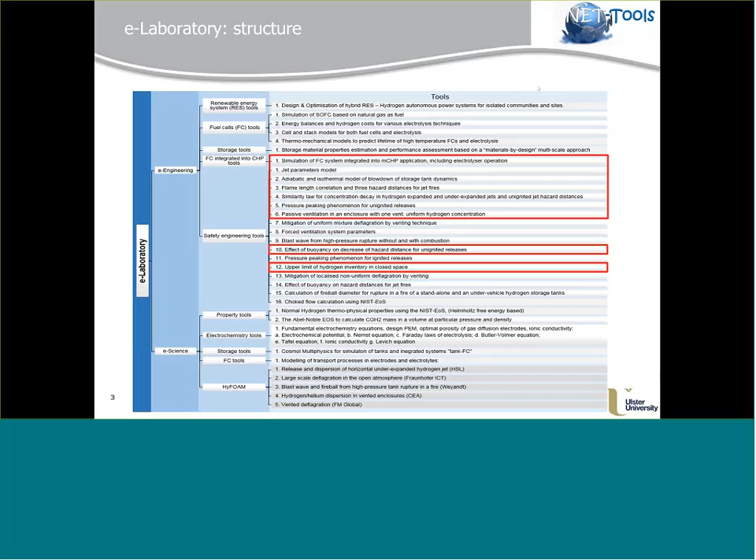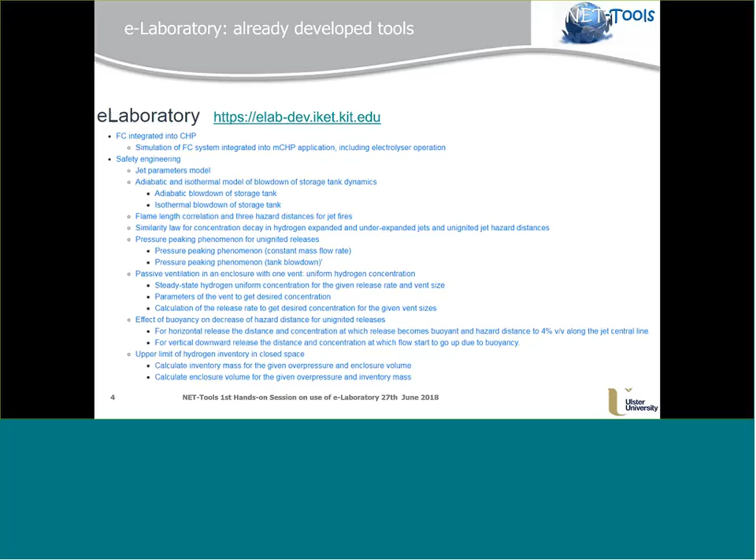So this is the way it looks now. You probably already saw this when you went to the link and logged in. This is the whole bunch of tools we have so far, and we'll start off talking about the safety engineering tools, the safety engineering toolbox, starting with the jet parameter model.

This model allows you to calculate parameters of the flow at the exit from the tank or pipe, or whatever happens, like in case of an accident, or if you need to calculate your flow rate for your particular installation when you have your pressure and pipe diameter. This model combines, it can be used for both expanded and under-expanded jets.

In this graph you can see the short description, where you can see the reservoir, where the flow velocity is assumed as 0, the nozzle at point 3, and the pressure and velocity equal to ambient and local speed of sound, which is called the notional nozzle or effective nozzle, at point 4.

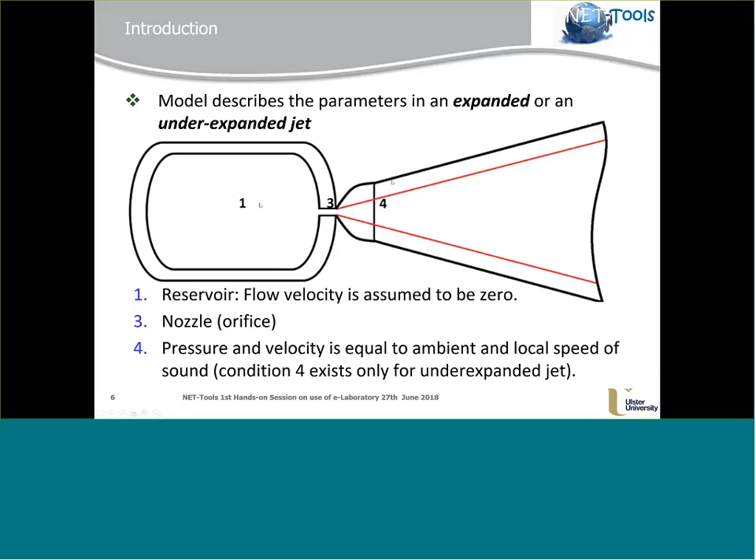Point 4 is only used when the jet is under-expanded. For an expanded jet, the conditions are taken from point 3 during the calculations.

Every single tool has the scenario details already pre-filled, so that whenever you click on the tool, you already have some data which you can change for your own purpose and calculate your own task. These are default values which we've taken from real scenarios to validate the model.

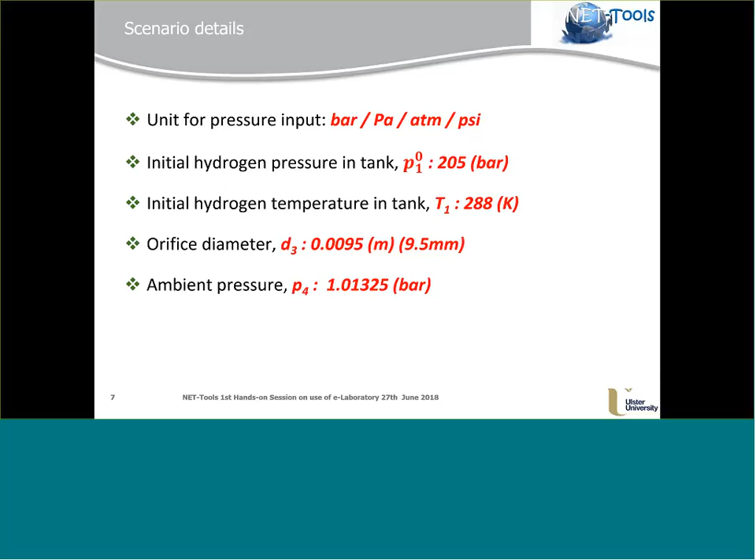If you click on the link for jet parameters tool, you will be able to see the screen where you can input your orifice diameter, nozzle diameter, ambient pressure, and pressure in the tank. You also have to know the temperature in the tank in order to be able to calculate parameters at the notional nozzle and at the exit.

There is also an option for every tool where you can change your input and output units for temperature, length, volume, pressure. During the development of the e-laboratory, there will be new units added, so that anyone in the world who uses the NET-Tools and e-laboratory can use their own system.

Every tool has a description, a short description, where you can read about this tool, what it calculates, and where it actually comes from. It includes all the links to the publications, because every single tool is based on a publication which is validated.

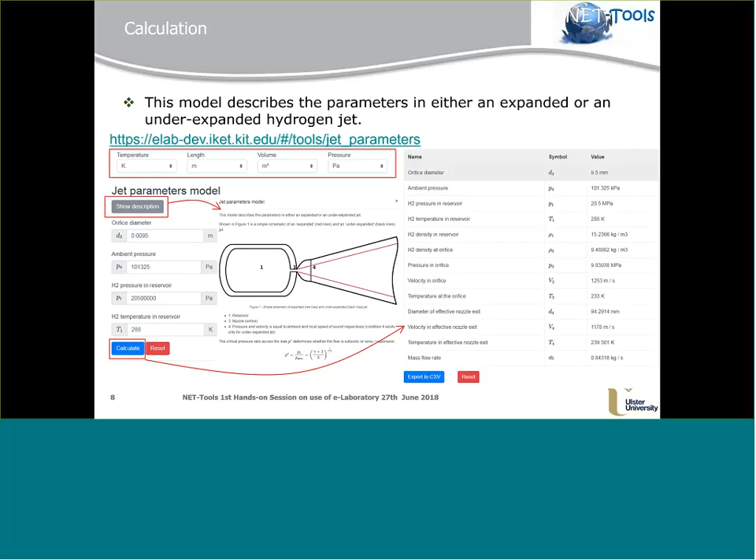Now, another tool from the safety engineering toolbox is the adiabatic and isothermal model for blowdown of storage tank dynamics. This tool allows you to calculate how the pressure in the tank changes with time for a particular nozzle, for a particular orifice, from a pipe or from a TPRD or whatever.

Since all hydrogen-powered vehicles have storage up to 70 megapascal, and at refueling stations it's even more, about 100 megapascal or 1000 bar, an unintended release from such high pressure can create a highly underexpanded turbulent jet.

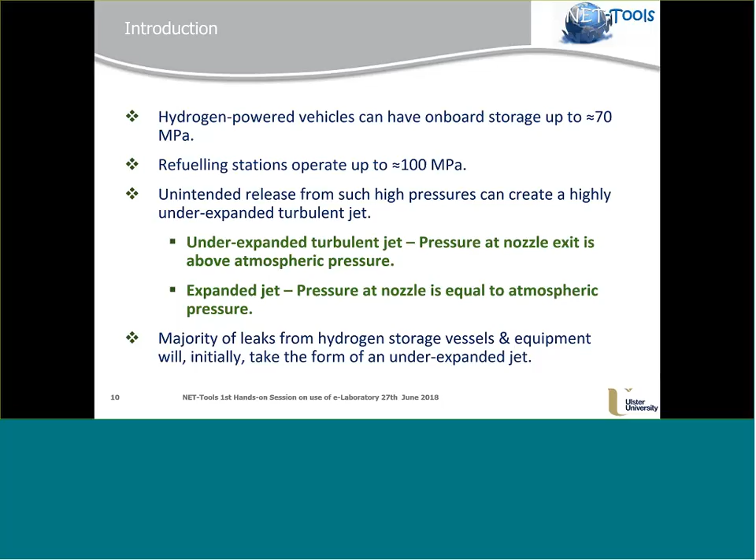The majority of leaks in storage vessels and equipment take the form of an under-expanded jet, and during the tank blowdown, it will end up expanded. So this model incorporates both the underexpanded part and the expanded part.

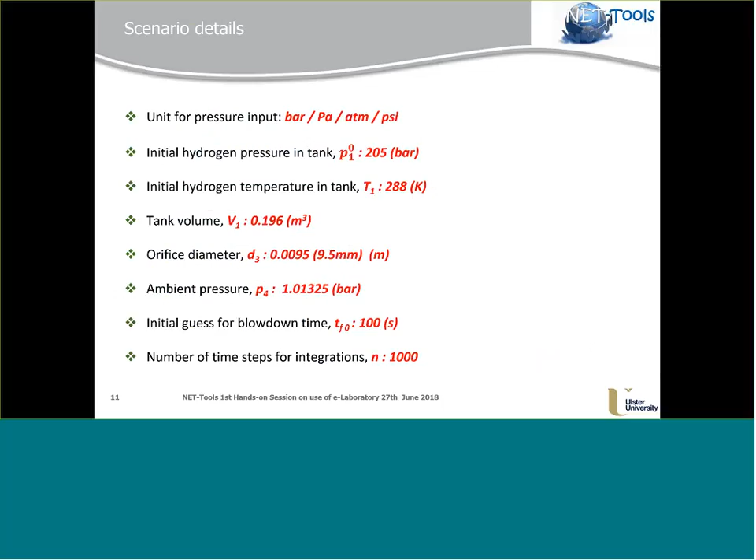So this is the scenario details which we use to validate the model and to check that we are getting the correct results for both cases.

There are two options, adiabatic and isothermal. In this presentation we'll cover the adiabatic part. It's pretty much the same in terms of interface, so I'm not going to cover isothermal.

The description here again shows you what the model is based on, all publications, and how it works.

After inputting all the parameters for the pressure in the tank, temperature, tank volume, diameter of TPRD or a pipe, temperature and pressure, you can get the full dynamics of the tank blowdown.

By changing parameters, you can calculate what time would be required to blow down something bigger, like a transportation lorry, big tanks, or smaller tanks, and you can play with the values and see in terms of the time by changing the orifice diameter. This gives you a feeling for how long you need, if it's indoors, for example what kind of ventilation rate you need to extract this amount of hydrogen from an enclosure.

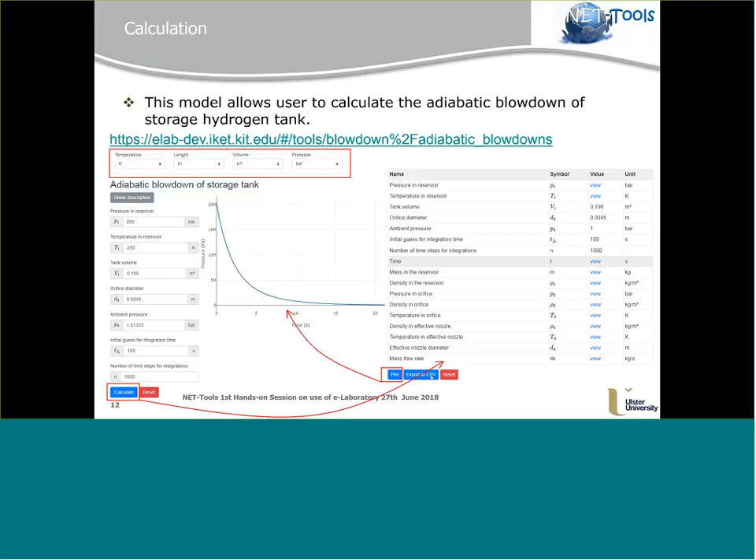Moving next, we have the flame length correlation and hazard distance for jet fires tool. This tool allows you to calculate the flame length based on the diameter of the release and the pressure in the tank. This tool uses the dimensionless flame length correlation, and all the links are provided in the tool description. It's only dependent on the parameter of the actual nozzle exit and the density of the surrounding air.

The separation distance, or hazard distance, was calculated using the LaChance publication, based on 3 parameters: no harm at a distance of 3.5 flame lengths, the pain limit at 5 minutes exposure at 3 flame lengths, and third degree burn after 20 seconds of exposure at a distance of 2 flame lengths.

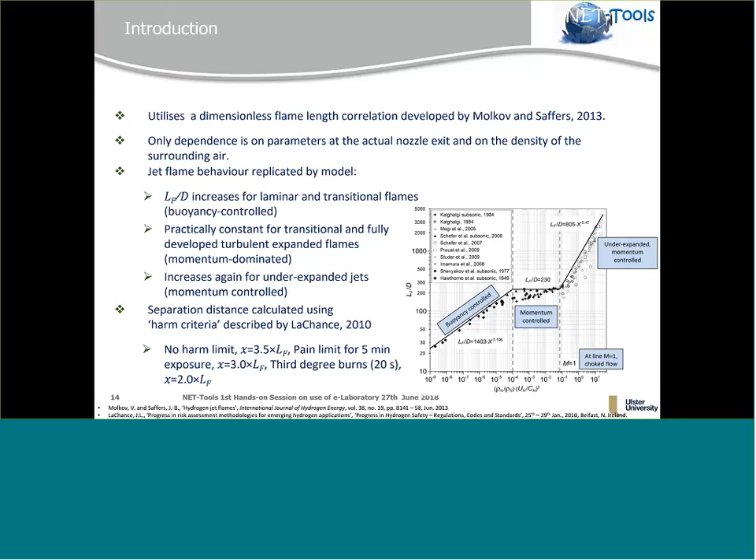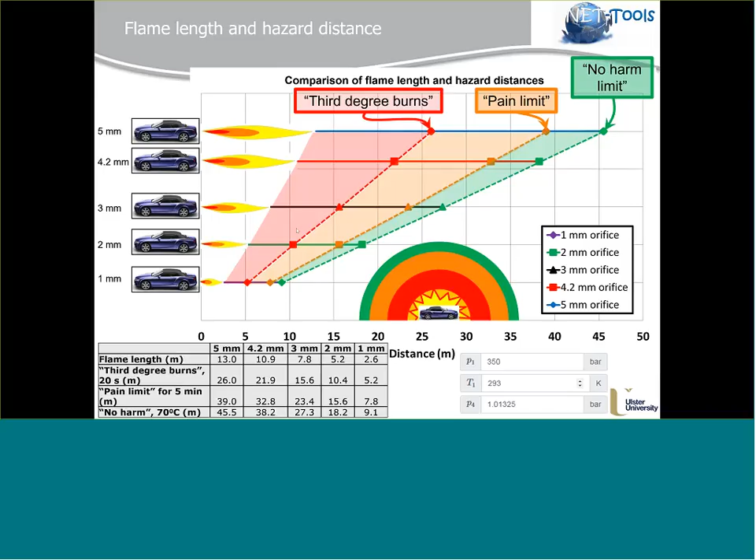So as I said, we had a 350 bar tank and let's say 1 millimeter diameter, and the results look like this. You can see that the flame length for a 1 millimeter nozzle diameter at 350 bar is 2.6 meters, while the separation hazard distance changes according to LaChance: no harm at 9.1, pain limit at 7.8, and third degree burn at 5.2.

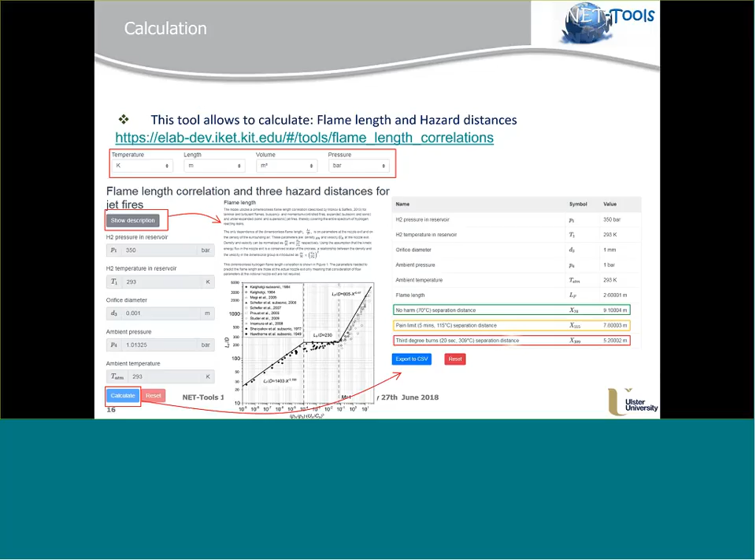The next tool from Safety Engineering Toolbox is the similarity law for concentration decay in hydrogen expanded and under-expanded jets, and unignited jet hazard distances. This tool allows you to predict concentration decay of hydrogen for subsonic, sonic, and supersonic unignited jets. It's also used to calculate the hazard distance formed by the size of the flammable envelope based on the 4% concentration.

The correlation is shown by the formula, where X is the actual distance from the nozzle, D is the nozzle diameter, rho n is the density at the nozzle exit, and rho s is the density of surrounding air. As well, C ax denotes the mass fraction of hydrogen at the distance X.

This tool allows you to calculate the distance from the nozzle to 4, 8, 11, 16, 29.5 stoichiometric, and plus you can specify your own concentration in the range from 4 to 75% and calculate the distance to this concentration along the axis. This tool utilizes the hydrogen jet parameters model for under-expanded jets and uses isentropic pressure and density relations for expanded jets.

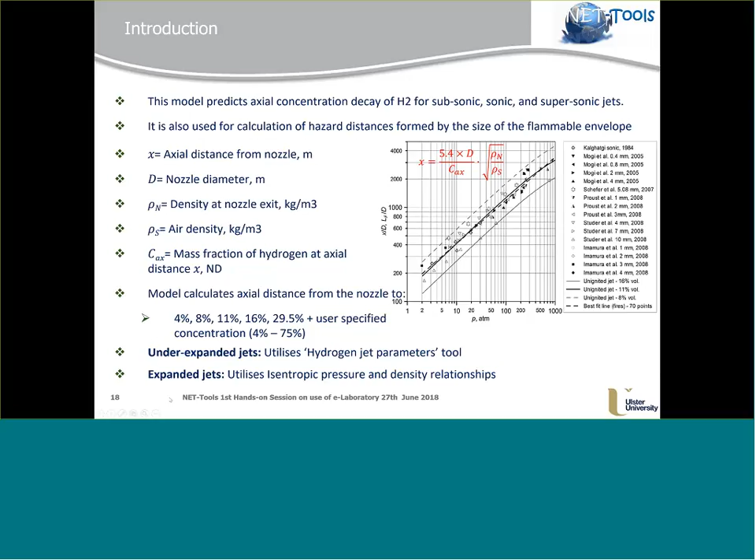Hold on a second. Yes.

And 4% is basically the hazard distance based on the hydrogen envelope: 32 meters for a 5 millimeter orifice diameter at 350 bar, which is quite long.

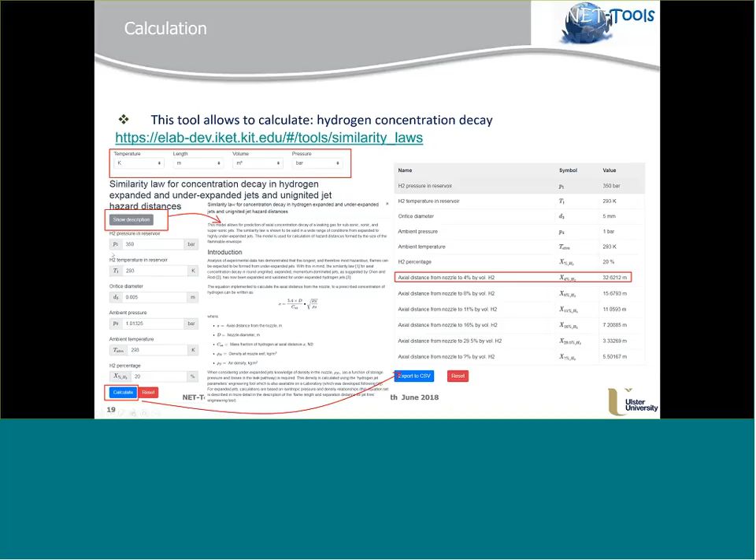The next tool here is the passive ventilation in enclosure with one vent for uniform hydrogen concentration. Why passive ventilation? Because it's different from natural ventilation, which assumes that the flow through the vent, the inflow of fresh air and outflow from the enclosure, is equal, and this flow is separated by a so-called neutral plane.

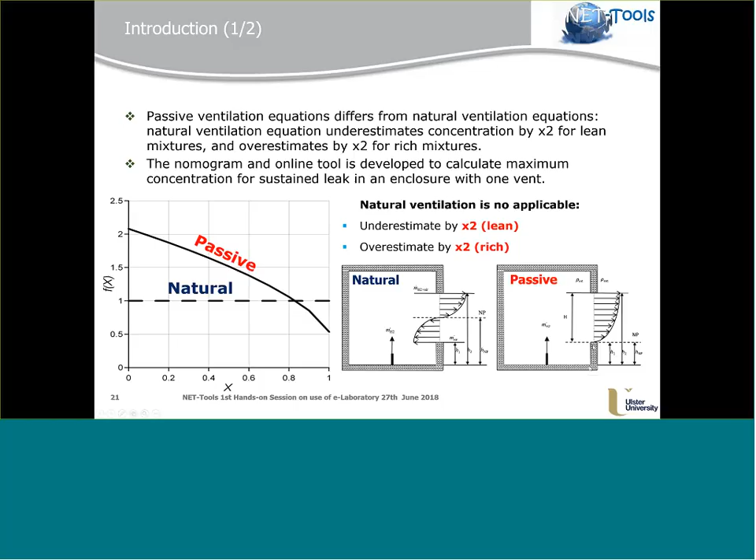A nomogram was also developed, and an online tool to calculate the maximum concentration for steady-state leak in an enclosure with one vent. In the case of passive ventilation, the neutral plane can be anywhere compared to natural ventilation, from the center of the vent up to the bottom, and it can even go below if the mass flow rate is very high.

One example: the maximum normal hydrogen discharge allowed for permeation from fuel cell leaks is about 150 normal milliliters per minute per car, which is a mass flow rate of 2.1 by 10⁻⁷ kilogram per second. With this mass flow rate, for a garage vent of brick size - 25 centimeters by width and 5 centimeters by height - we get about 1% concentration at steady state inside the enclosure.

But since the ventilation rate for natural and passive ventilation is proportional to the area of the vent times the square root of the height, the difference for the same area - if you make it not horizontal but vertical - the efficiency will increase by 2.2 times, which will reduce the concentration of hydrogen and probably allow a higher permeation rate. This also has to be taken into account while doing hydrogen safety engineering, especially for natural or passive ventilation systems.

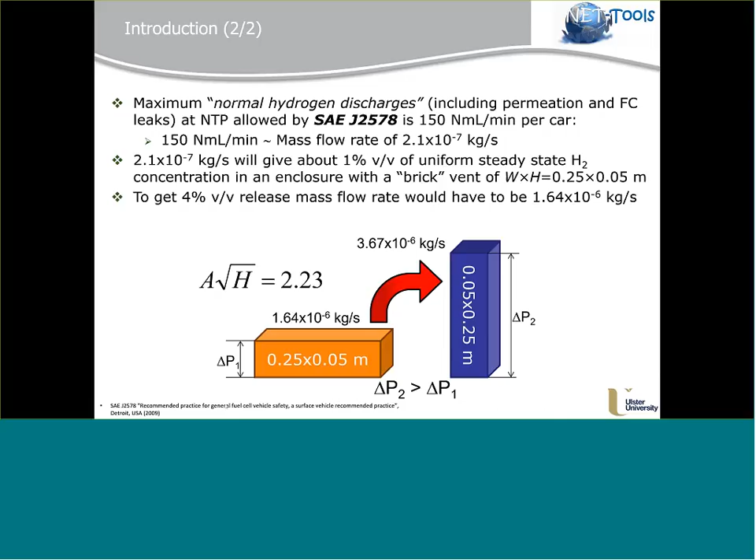This is the nomogram, the graphical representation of the tool. The set of equations are shown on the left, and if you need to quickly assess the concentration in the enclosure with a particular vent, and if you know the hydrogen flow rate for the given installation, you can use this nomogram and calculate on site.

The example is given for 1 gram per second, equivalent to about a 50 kilowatt fuel cell or light duty vehicle. The calculation example shows you start by selecting the release rate of 1 gram. On the bottom graph, you select the height of the vent, then on the right top you select the width of the vent. Let's say we have half meter height and 1 meter width.

Then you drop the line to the function curve, and you'll get that the concentration for this particular vent with this flow rate will give us an unacceptably high 13.6%.

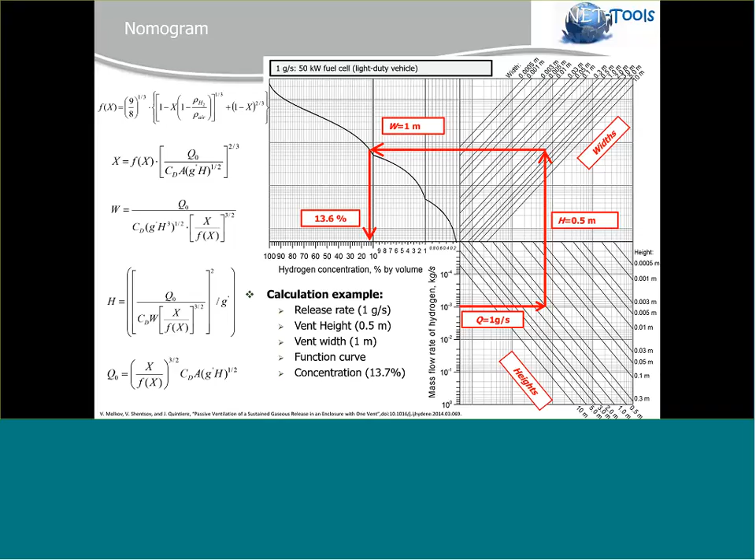But if you want exact results, it has some error of course, because it's graphical - it probably will give you 5 to 10% error. If you want exact results, you would need to use the tool. This nomogram will be available to download and print shortly with the development of the tools, but for now you can only go and calculate all the parameters from the laboratory.

You need to specify ambient temperature and pressure, and the discharge coefficient for the ventilation. Discharge coefficient shows the effective area of the vent which is used for ventilation. The default value is 0.6, which is commonly used and validated, however for different vent parameters it can be different.

In this case, we select an input of 1 gram per second release with half meter height and 1 meter width, and we got 13.6% of hydrogen for the enclosure - 13.6% uniform concentration of hydrogen in the enclosure.

Next tool is pressure peaking phenomena for unignited releases. These tools give you the pressure dynamics inside the enclosure in case you have an unscheduled release, because all hydrogen vehicles kept inside confined spaces can cause this hazard, and it was proved, with a number of publications done on this. This can result in really high pressure inside the enclosure, which could create major damage or even collapse.

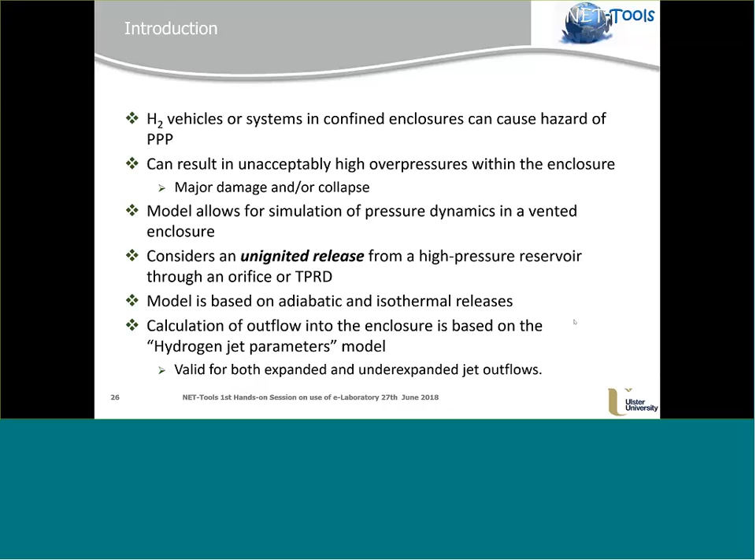Let's consider the unignited case for a high pressure tank through the orifice, or the TPRD, which can be triggered due to fire or malfunction. This model is based on the adiabatic and isothermal release, and it can be used for both. It also uses the hydrogen jet parameters model to calculate the flow rate from the tank, and it's valid for both expanded and underexpanded jets.

This graph shows the overpressure effects on buildings and humans. As you can see, an overpressure of 0.2 bar, or 20 kilopascal, is capable of destroying residential structures and making them collapse, while causing common serious injuries and possible fatalities to humans.

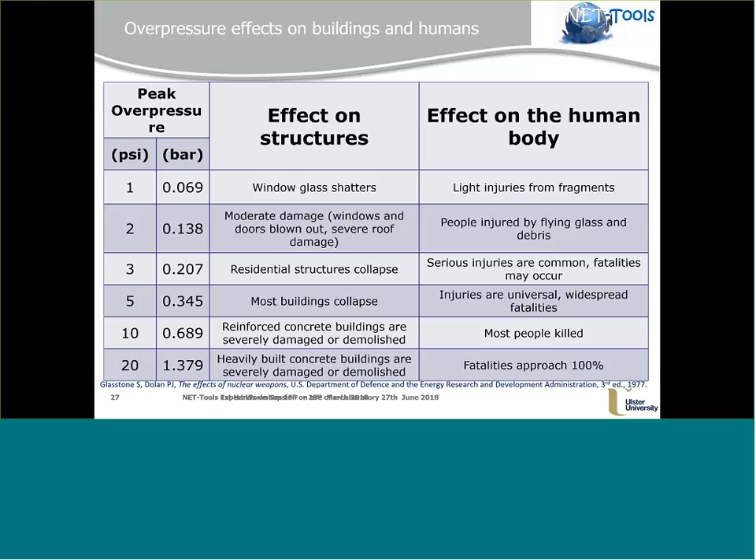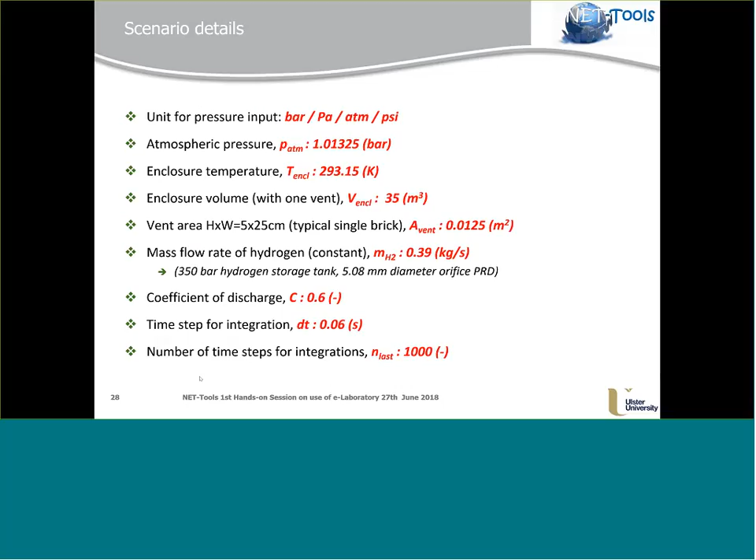The scenario details are taken from the most common case: a garage of 35 cubic meters volume, normal temperature and pressure, typical single brick vent size, and the mass flow rate for a 350 bar storage tank with 5 mm TPRD, which would give nearly 0.4 kilogram per second of hydrogen.

So while doing hydrogen safety engineering, I think it is essential to check whether your ventilation parameters are sufficient to withstand the pressure peaking phenomena. This tool is quite flexible to assess the dynamics of pressure inside.

You can combine all the areas of your ventilation. It's not only for one vent or two vents — you can combine all your ventilation openings and calculate the total area, and you can specify the pressure inside the tank storage facility. You can specify diameter, and in the end you will calculate your pressure dynamics as well as the mass flow rate and overpressure.

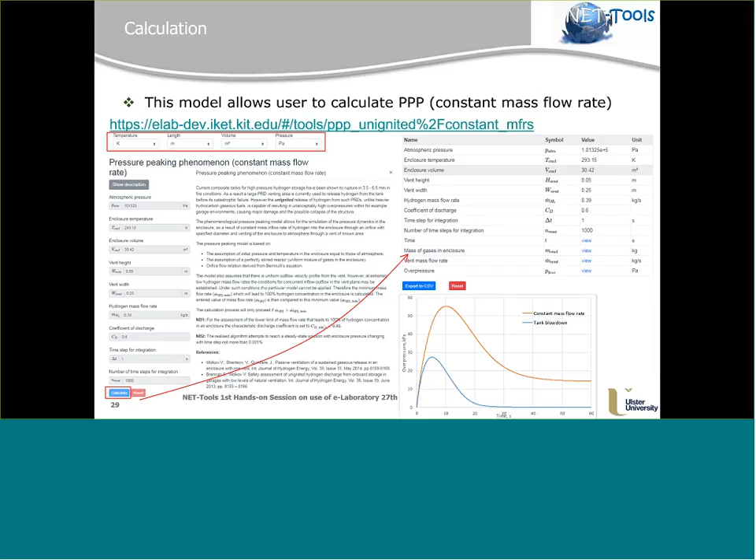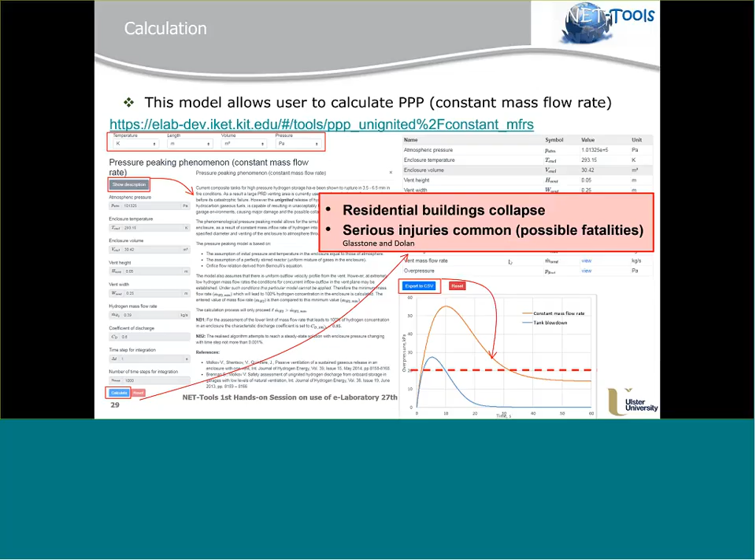That's what I wanted to say: at this level of overpressure, most residential buildings will collapse, and this will cause serious injuries and possible fatalities to humans.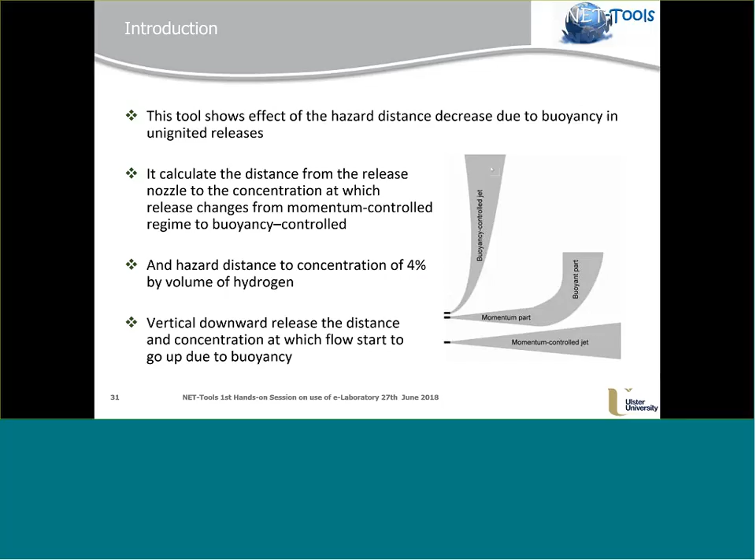It also gives you the hazard distance to a concentration of 4% by volume. Another feature is you can calculate the vertical downward release and the distance and concentration at which the flow starts to go up due to buoyancy. This is how the tool looks: you need to input the pressure of the tank, temperature, and diameter. After calculation, you will get the distances to every concentration, and you can specify concentrations such as 4, 17, 30, 40, 50, and 60, which are predefined, and you will get the distance to these concentrations, as well as the distance to the turning point for the downward release.

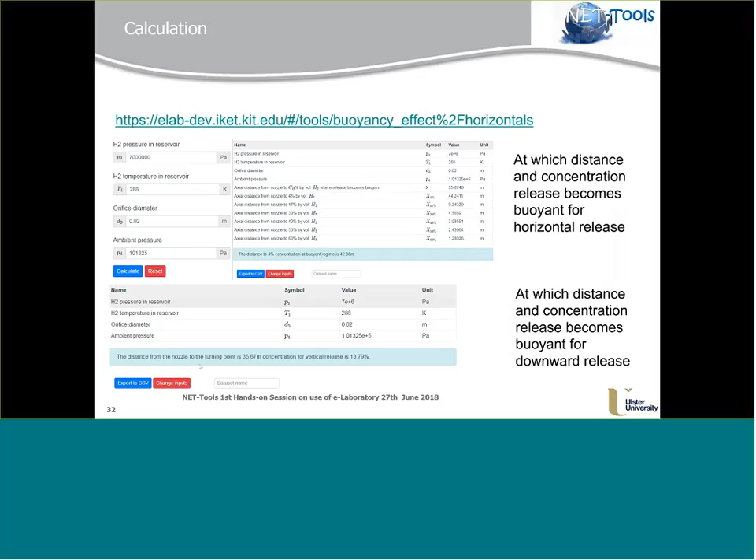Now we move into the next tool: upper limit for hydrogen inventory in a closed space. The model behind this tool allows you to predict the mass of hydrogen which may be allowed to be released inside an enclosure, without causing any destructive overpressure. The model assumes that the enclosure is filled with hydrogen and air at initial pressure.

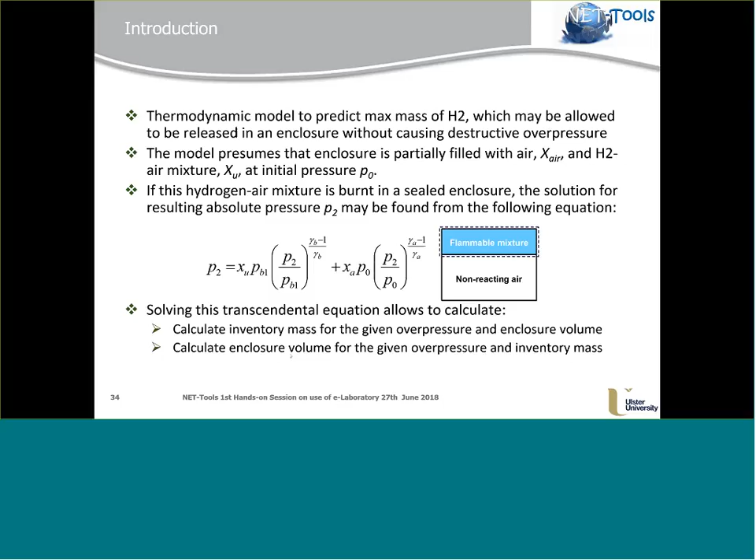If the hydrogen-air mixture present in the enclosure is burned, the solution of this equation will result in an absolute pressure, which can give you a clue whether you are on the safe side or not. This tool allows you to calculate these transcendental equations, to calculate the mass of inventory for a given overpressure and enclosure volume, or to calculate the volume for a given overpressure and inventory mass. So it has two options, and both are shown here.

For example, you need to calculate what mass of hydrogen in an enclosure of, let's say, 35 cubic meters you may allow without exceeding an overpressure of 10 kilopascal. You put in temperature, ambient pressure, the overpressure you want not to exceed, and the enclosure volume, and it will give you around 8.9 grams of hydrogen that can be safely released and burned inside an enclosure of 35 cubic meters.

The other way around, if you need to calculate the volume of an enclosure which you're probably looking to withstand a certain overpressure, and you have a particular amount of hydrogen you want to store — whether it's a warehouse, something really big, or a small garage — you provide values for the overpressure and the mass, and at the end you will have the enclosure volume. So it works in both ways.

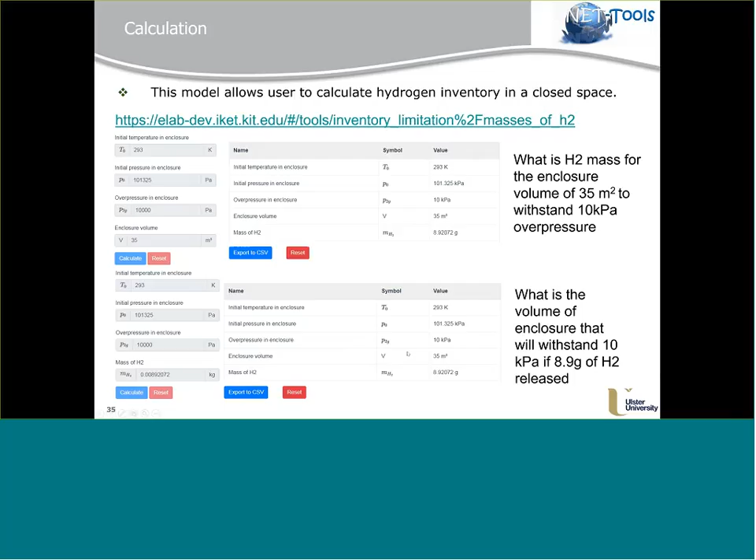So the first 8 tools were about safety engineering. Now we are moving to the next section, which is fuel cell integrated into CHP. This tool was developed by our colleague team from University of Perugia, but due to overlap with other meetings, they are not able to talk about this tool, so I will be talking on behalf.

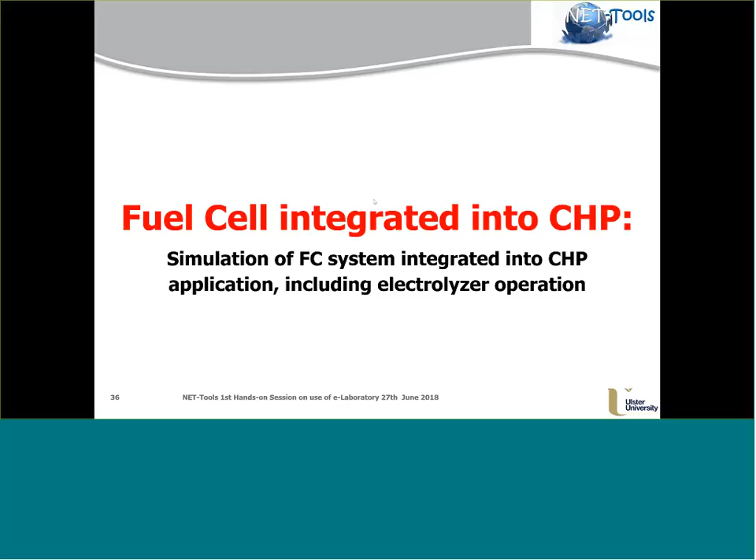So this tool allows you to simulate the fuel cell integrated into CHP application, including the electrolyzer. The model behind allows you to calculate the payback time for the fuel cell combined heat and power unit once it is installed in the building. It helps you understand and evaluate the convenience and profit you can get from installing fuel cell technology inside your house.

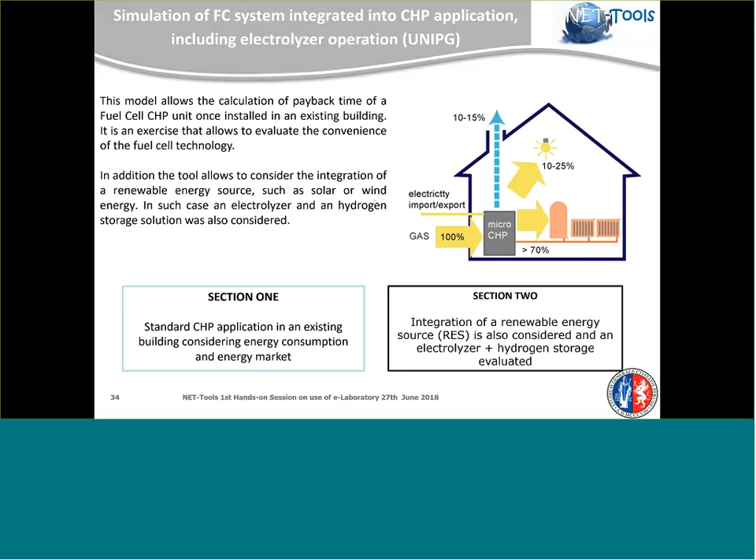Additionally, this tool can also consider integration of renewable energy sources, such as solar panels and wind turbine energy, and in such case, an electrolyzer and hydrogen storage solution was also considered. We have two sections: one with the standard CHP application, and a second section with integration of renewable energy sources plus hydrogen storage evaluation.

The purpose of this tool is developed for engineers and technicians who are not confident with the technology, to evaluate the performance of micro CHP based on fuel cells for an existing or new building, estimating energy consumption. Private investors such as ESCOs looking for convenient technology for energy and heat production.

Private citizens can calculate based on energy consumption and cost for their house, and see the economic feasibility of changing the existing boiler with a new, more efficient system. Students from university can use this tool for training purposes, in order to predict and design new CHP units based on novel fuel cell technologies and maybe new technologies, etc.

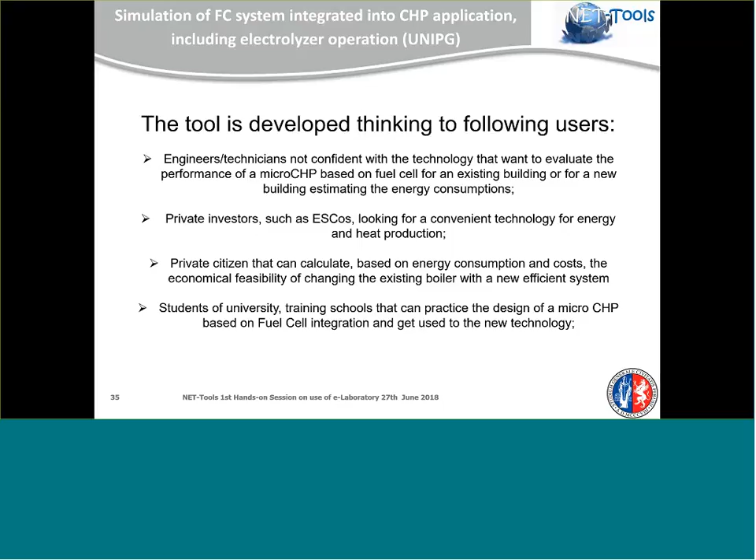For inputs, you have monthly electricity and heat consumption, efficiency of your boiler, and CHP inputs would give you the unit size, thermal and electrical efficiency, and unit cost. The market inputs require electricity cost, retail price, and the cost of gas. For integration strategy, you use the utilization factor of the unit during the year, which is basically the depreciation per year.

In section 2, you have monthly utilization factor, power usage, and unit cost of RES, renewable energy system. For storage units, you have electrolyzer and fuel cell efficiency, unit cost, and hydrogen storage unit cost. As a result of calculation, you can see the payback time in years and what are the energy flows during the year.

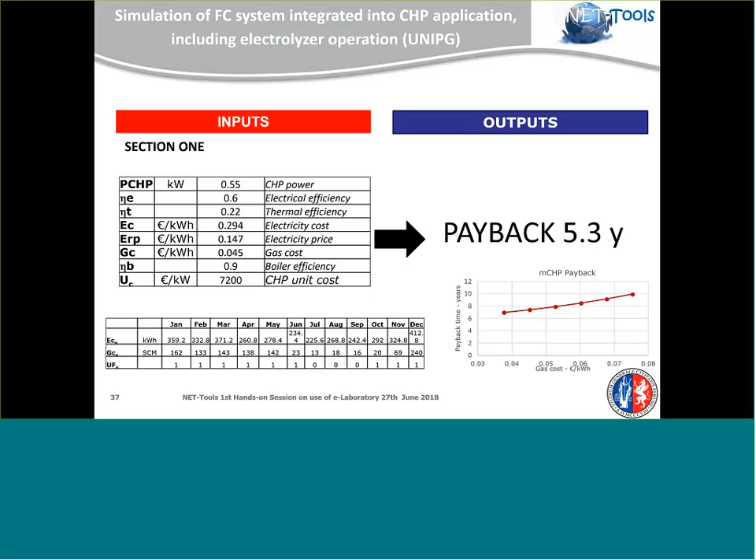To be honest, I'm not that familiar with this tool, and I probably would need to talk to our colleague from Perugia, but it looks like he is not here, so I will simply continue.

At the end of calculation, you get tables where you can see the contribution of renewable energy sources and fuel cells, and the payback to include renewable energy sources is increasing, because you need to have storage and solar panels or wind turbines, depending on your inputs.

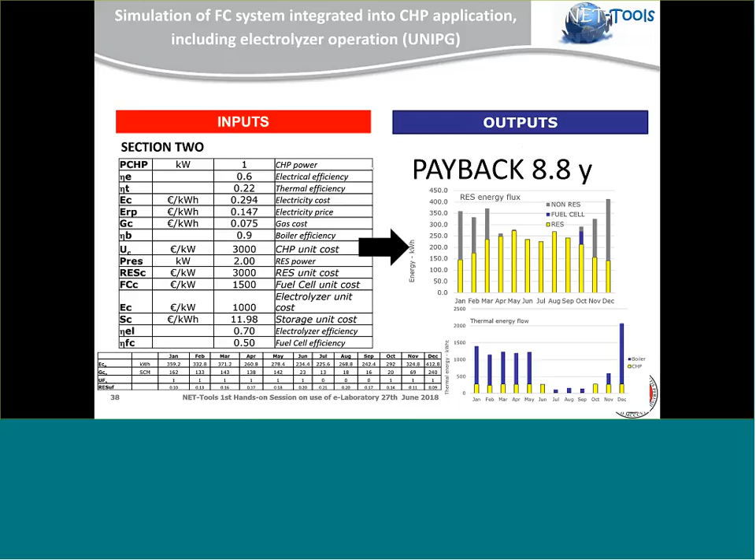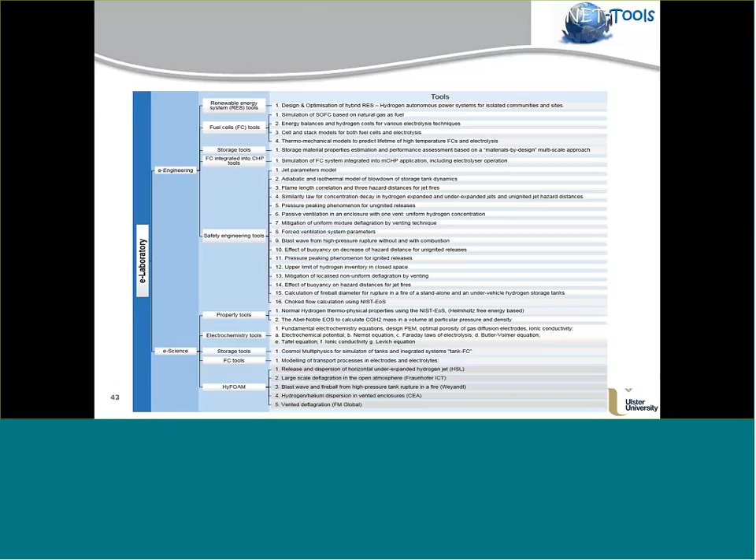So there were 9 tools covered during this presentation, and within the next slides I'm going to quickly cover what other tools we are going to develop within the next 20 months.

Within the safety tools, we are looking at another 7 tools.

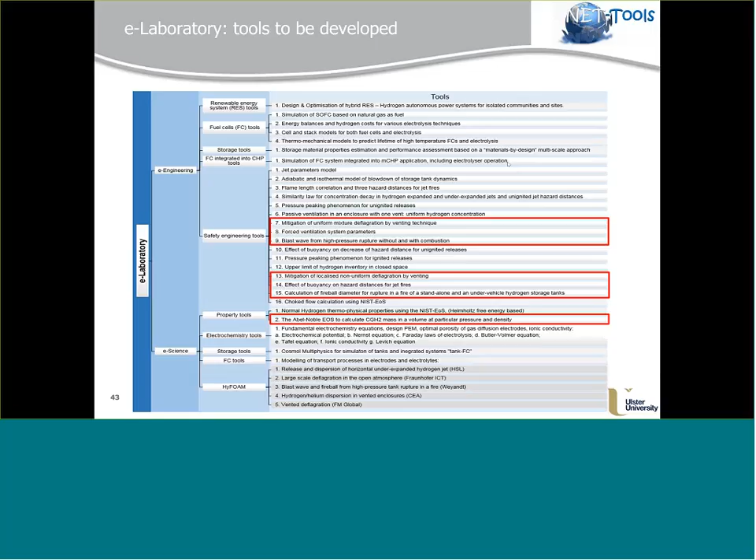There is also a number of tools in e-science, in HyFOAM, and e-engineering. The e-laboratory of engineering toolbox will have another tool for mitigation of uniform mixture deflagration by venting technique.

This tool will allow you to calculate the vent area required to reduce deflagration overpressure to a given level, or estimate overpressure for a vent of known area. So if you have a warehouse or hydrogen installation system with ventilation, you can calculate what would be the overpressure for the ventilation when you release a certain amount of hydrogen inside, or you can calculate the vent required to mitigate the overpressure.

Another tool is the forced ventilation system parameters, which allows you to calculate the ventilation flow rate of air required in a steady state regime to get the desired concentration of hydrogen based on the gas release inside.

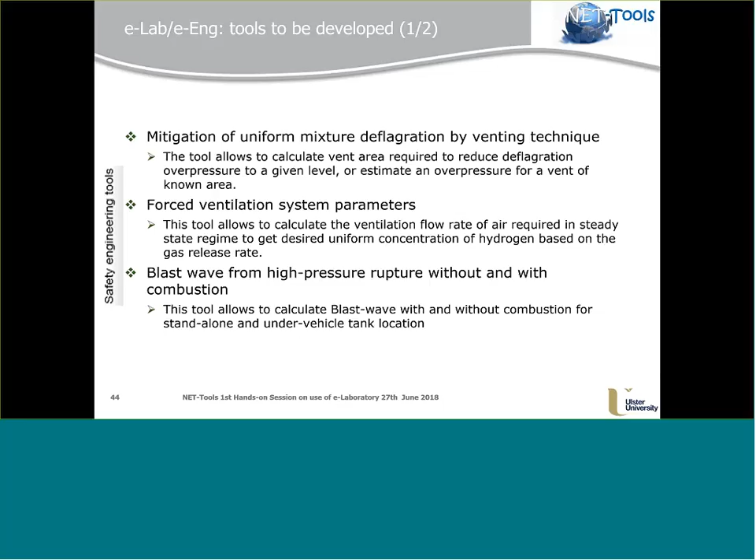Then the pressure peaking phenomena for ignited release will give you the pressure dynamics inside if the jet is ignited. This is for jet fires indoors, which are more pronounced compared to unignited releases.

The effect of buoyancy on the hazard distance for jet fires as well. Another tool is a continuation of this, covering the buoyancy effect for unignited releases.

In terms of deflagration, there's another tool for mitigation of localized non-uniform mixtures, which allows you to calculate various parameters like area and overpressure for the enclosure of a given volume, with a certain amount of hydrogen released indoors.

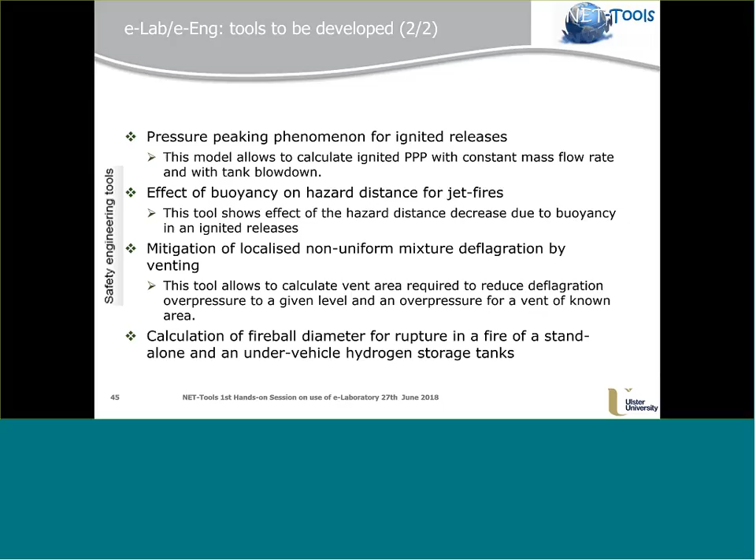One of the last tools for the safety engineering toolbox is the calculation of fireball diameter, in case of tank explosion, whether it's a standalone tank or on a vehicle. The fireball is different, so the user can select the location of the tank, whether it's an experimental setup or a real case with the tank underneath the vehicle, and calculate the diameter of the fireball of the engulfing fire to understand the hazard distances associated with this hazard.

Among the property tools, there's a tool to calculate compressed gaseous hydrogen storage, which allows you to calculate the volume and density of hydrogen inside the tank.

In terms of CFD applications, there will be a number of guidelines and examples given for different applications of so-called HyFOAM, which is an open source code for CFD applications.

There will be 5 tools, 5 cases described: release and dispersion of a horizontal under-expanded hydrogen jet, this is the HSL experiment; large-scale deflagration in an open atmosphere, Fraunhofer; blast wave and fireball from high-pressure tank rupture in a fire by Weyandt; then hydrogen release and dispersion in a vented enclosure, and the vented deflagration case.

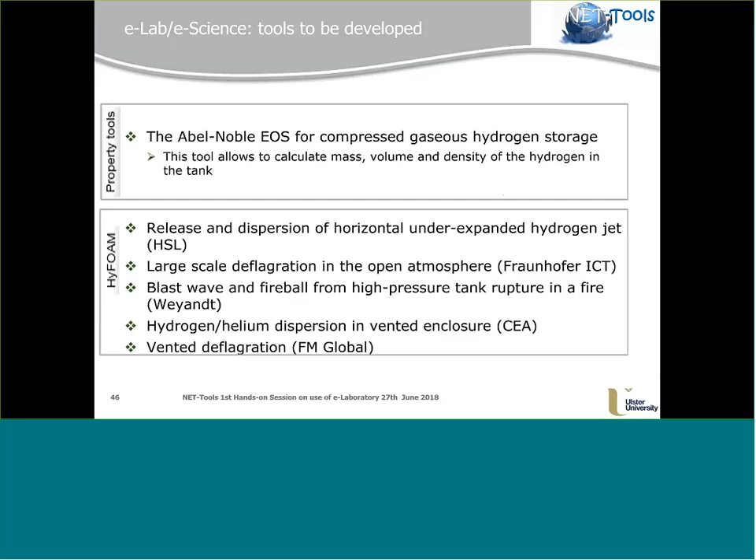So there is a lot of work to be done, and so far this is our first beta version. It's not yet embedded into the platform, it's not available to the public, it's only available for a small group of people who can test it, look at it, and find some bugs.

The aim of this webinar was to introduce you to this platform, to the first steps we made during the last month of working on this project, and to receive feedback, positive or negative. Every feedback is really appreciated, and we are aiming to make it as best as we can.

So we have 32 tools altogether to be delivered by the end, and 9 tools already developed and deployed, and new ones will be added as they become available.

The next hands-on session is planned by the end of the project, within the next 1.5 years. There will be another one, so I really encourage all of you to keep in touch and subscribe for our next hands-on, where we hope all tools will be here. It probably will change the idea of the webinar, and maybe we'll be working with given examples, so then you can calculate, more in an interactive way, I would say.